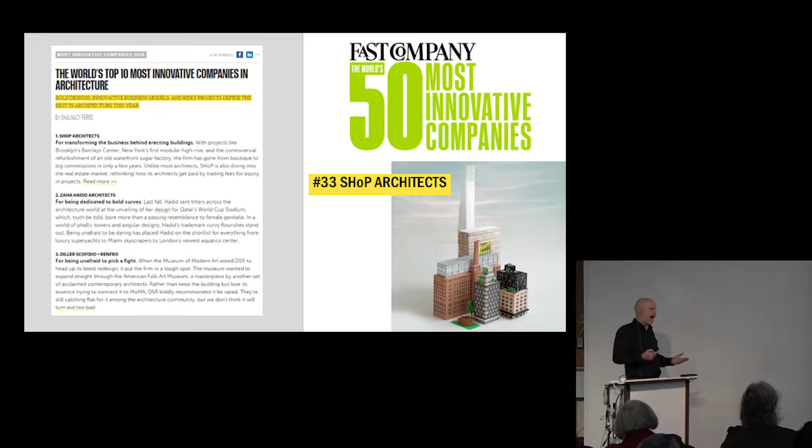The other side to the practice has to do with how we've embraced technology. We came out of school in the early to mid-90s, and technology was taking shape in the form of CAD, but also, more importantly for us, 3D modeling. It's funny when you look at it in the context of the history of architecture - sort of like Back to the Future - the level of complexity you see in Gothic architecture is almost a three-dimensional puzzle. Architecture is a very complex game on many different levels, and technology has allowed us to get back into it, where we can actually begin to talk and work directly with the people who craft our buildings.

And almost rethinking the way that we manage complexity. When I came out of school, plan and section was still the way that everybody managed this information. But really, it's moving beyond a representational document to an instruction set. When you look back at those model kits you built as a kid - hundreds of pieces, axonometric drawings - you never felt like you had to pick up the phone and call Tokyo and ask how to put your kit together.

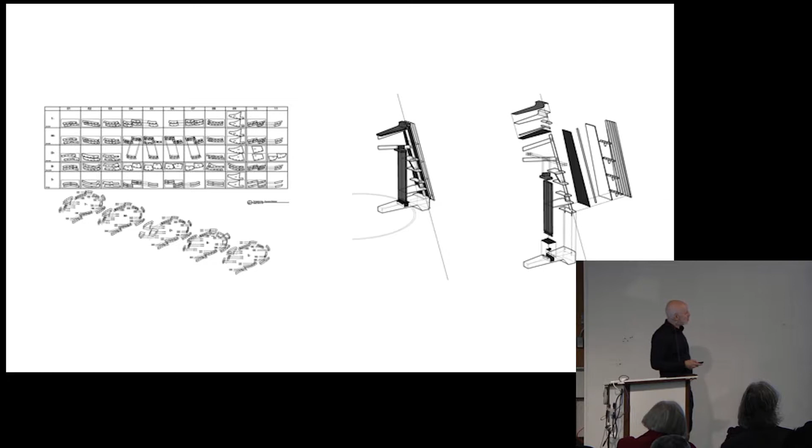That's what happens on the job site all the time - all these RFIs always asking, how do you do this? So we started looking at, especially on our earlier projects, how we began to manage this information in model form and index it, take it apart, so we can rotate it around and show it to the people who are actually going to build it. Much easier than looking at something in 2D and then trying to translate it into the third dimension. Things get lost.

Very early on in the practice, we started looking at these smaller projects as a chance to test out some of these ideas. PS1 was a very small project for a contemporary art museum that had this summer program, and we developed pavilions that would be occupied during the summer, based on the theme of the beach. We modeled everything in the computer, but instead of generating plans and sections, we literally developed a set of instructions.

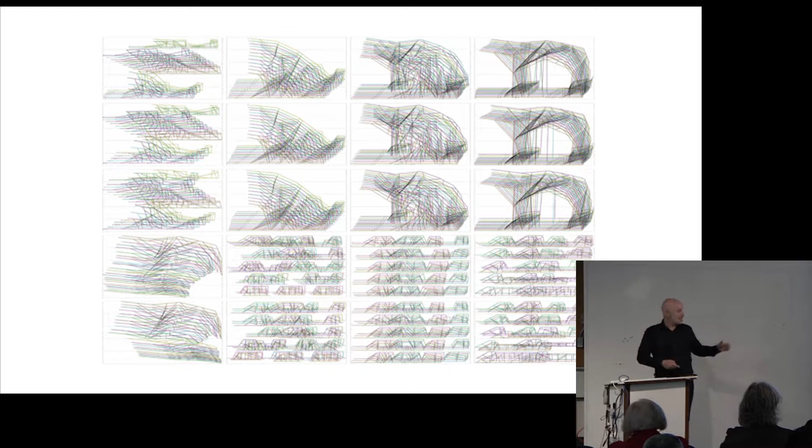These drawings here, you can't really see it because they're all sort of faded, but each sheet is about 1 meter wide by 5 meters long, ganged together to create a 15 by 20 foot long jig where you would actually build literally on the drawings. So in a way, instead of looking at a drawing, you were literally building off of it.

This came together, and we didn't really think it was polemical, like this is the Rosetta Stone for how we should be looking at architecture. It wasn't until a decade later that we realized how this was really the origin to our thinking about how important that digital model was and how it carries forward.

So there are a series of questions that I posed through this talk, and the first one is: what does it mean to be a master builder today? In a way, it's about not just designing, but how you execute on the design - how you collaborate with the people who are actually going to put the building together. You don't do that in that first project; you don't try and tackle everything in that first go round.

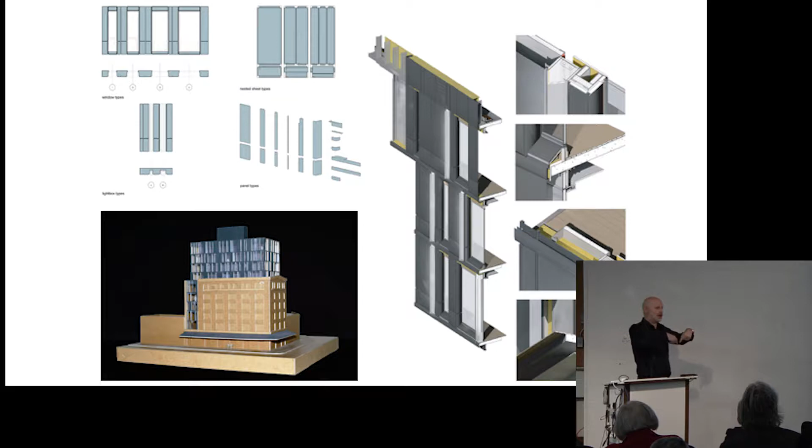For us, on one of our earlier projects from 2001, the Porterhouse, we literally focused on the envelope of the building to test out some of these concepts of direct-to-fabrication. We took raw zinc meter by 3 meter sheets and began to nest the panels on that, and actually generated the shop drawings. We emailed those shop tickets out to Malloy Laser on Long Island, where they were laser cut, then broken, and brought back to the site.

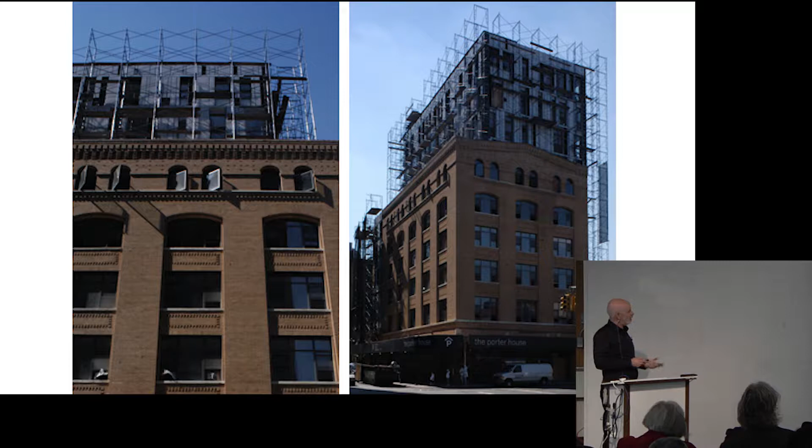These are some of the index sheets we generated for that. On the panels, before the white plastic's removed, you can see information telling you exactly where that panel goes on the building - like a watermark. It was a great opportunity to create a highly unique, beautiful, simple zinc facade with a variety of different panel shapes for the conventional cost of construction. We did this project for about $45 a square foot - that's 2003 numbers - but it was a chance to create something iconic at a conventional price.

I think we wouldn't have been able to do that without the use of this type of technology, that interface between the design process and the actual making.

One of the challenges we had is, in New York, we have a lot of pigeons, and the fear was you get a pigeon on this beautiful zinc, you'd have droppings all over the building. So we got in contact with the Natural History Museum, and they told us the angle of repose to keep your bird off was about 32.5 degrees. So we created what we call the pigeon slide. To this day, Porterhouse does not have any pigeon poop on it - simple things like that can just ruin a building.

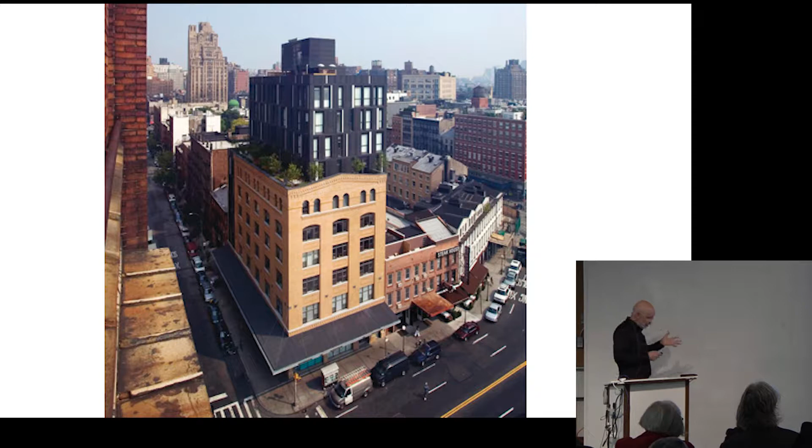And then there's some views. So this is 2003 when we finished this, and then in 2009, we had a chance to supersize this concept - instead of doing a 10-story residential building, actually beginning to wrap a whole arena in an envelope which we would design but also execute with the fabricator.

We didn't start off with this project outright. Actually, Frank Gehry had come up with a brilliant master plan where he had a collection of buildings that would basically cup the arena, and the structure for all these tall buildings actually went through the arena. The thing is, in 2008 we had the financial crisis, and there was no way the developer could finance the whole project at one time, so they had to break that apart.

The challenge is, in December of 2009 they had to have the shovel in the ground, or the developer would lose about $300 million in tax-free bond financing. There was no way, even if Frank Gehry moved ahead, that he would be able to get those CDs done in time to get that project online. So the design builder, Hunt Construction, told the developer, if you want to meet that deadline, you basically have to have already designed this building and built it somewhere else.

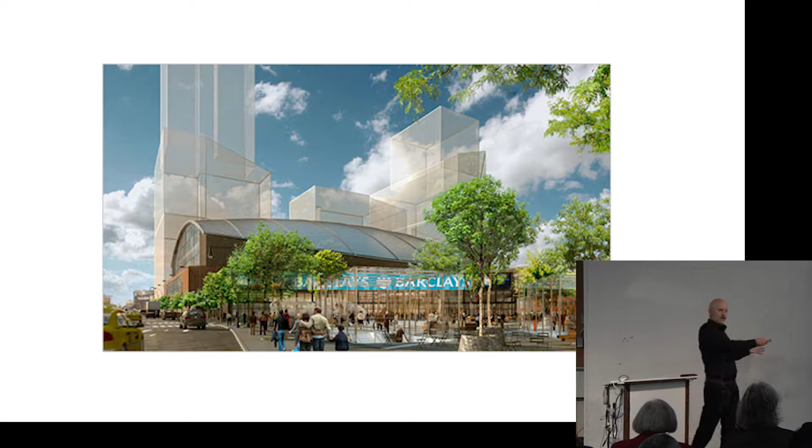And that's exactly what they did. They started going around the United States looking for an arena that would fit on this site, and they came up with the Conseco Fieldhouse. Unfortunately, the problem with this is Mayor Bloomberg and Amanda Burden, head of city planning, had just approved the Frank Gehry scheme. And then they got a bait and switch, which was a field house from Indianapolis.

So we got a call, they came into the office and said, we need something more iconic than this. We were already thinking, well, we could change this, we could change that. And they said, no, the steel's been bought, all the precast has been bought, you can't change the shape. And I remember in that meeting, we're like, well, that's like putting leotards on a pig. What are you going to do about that?

We figured if anybody was going to do this project, it should be a New York office. So we put our heads together and started thinking about how we could transform this into a building that really was very much a part of Brooklyn, with a sense of civic presence in the downtown.

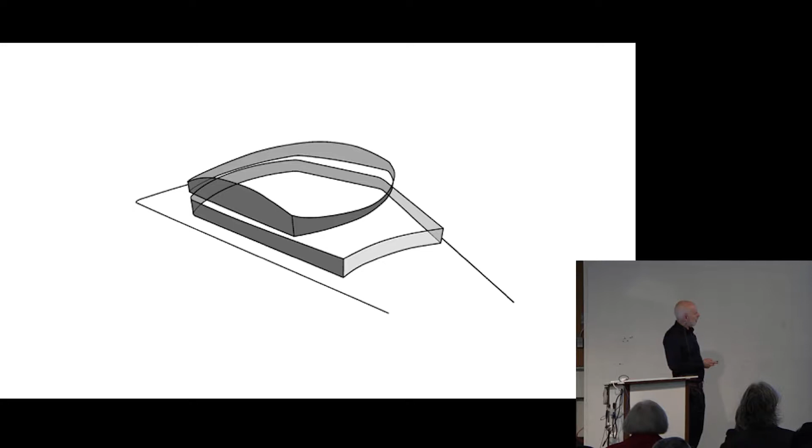So the first thing we started doing was figuring out how to break the mass of this building down into different scales. We created these bands, and at the same time opened the building up to the city around it. There's a major transit hub at the foot of the plaza, and the whole idea was creating a view where you could actually look from the plaza all the way into the bowl.

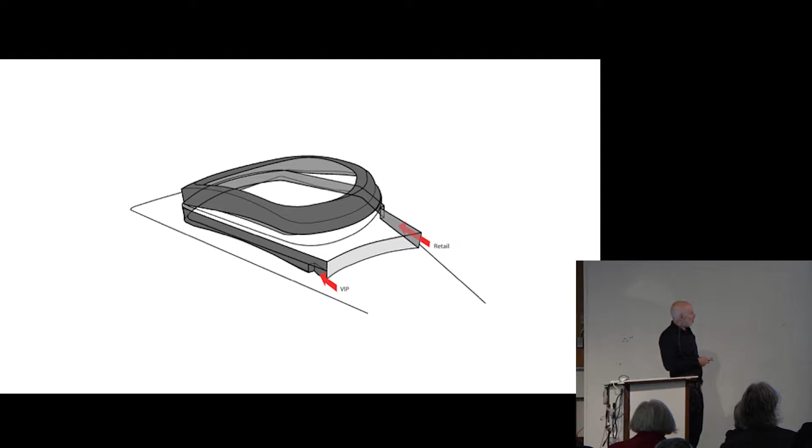Then we started shaping the form of the building to give views out back to Brooklyn, and creating openings along the side for retail and the VIP entrance. But for us, the breakthrough of this project was really about: you're plonking an arena in downtown Brooklyn, and you've got to give it a sense of civic presence, a place where people will gather before they go see these events, concerts, or sports.

So we created this porch with an Oculus in it. As you're moving up through the train station, you're actually looking through this space, and that Oculus becomes the marquee for the building. So a little more about the scale of it.

One of the key things for this project was we put the main concourse at the same level as the sidewalk. So when you go in, you're literally at the main level of the whole arena. You're not going up, you're not going down. You can actually look right out into the bowl.

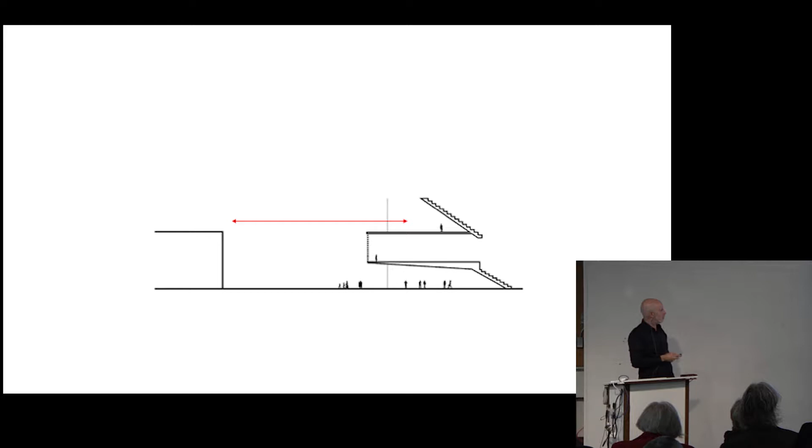Then at the upper level of the halo, we have a break, and that's in line with the heights of brownstones to the east and south of the building. And to the west you have much higher structures, so again we tried to make a proportional relationship to those as well.

We have nine subway lines converging at this point. People are coming up, so it's really transit oriented—this is not about people driving their cars. Pretty much 95% of the people come to this arena using public transit.

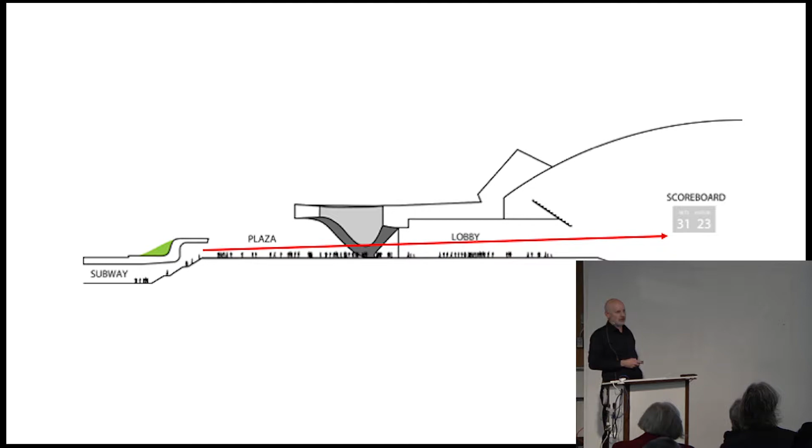It's a very iterative process. It's like designing a suit. As you're designing, you're tailoring it, you're having your second fitting. But you're not doing one model and then throwing it away and starting a new model when you go into construction. The model actually carried through design into the construction process.

And the way we did that, we started breaking down portions of the facade so that we could analyze it for quantities, so that we could really begin to optimize the surface area to get it within budget. So this really wasn't about compromise, it was more about what we call design optimization.

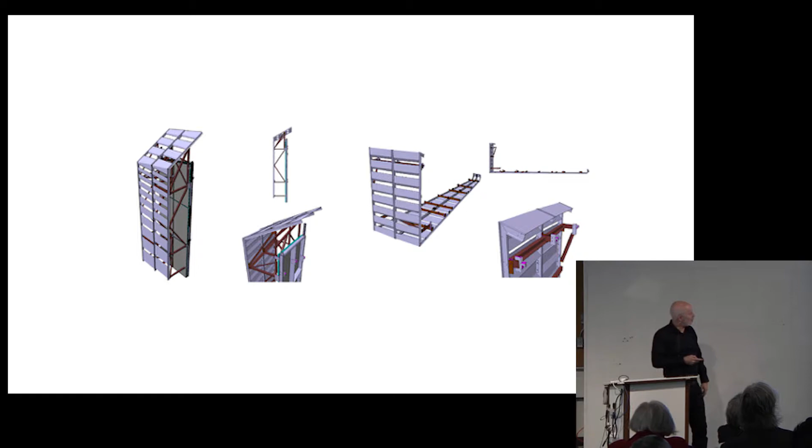And then this is a picture of the CATIA model. We use CATIA predominantly for our envelope work because we can go directly from design into fabrication with this technology—aerospace technology that Dassault Systèmes produced. And you can see here are just some view captures of some of the mega panels for the facade, and then one of the prototypes that was developed for wind tunnel testing.

So imagine you have 12,000 panels, and the old school way of doing it is you have one person doing a shop ticket, or a bunch of people doing a shop ticket for each one of those panels. John Cerone and Brian Sweeney from our office received information from the facade fabricator saying this is the information they needed to calibrate their machines.

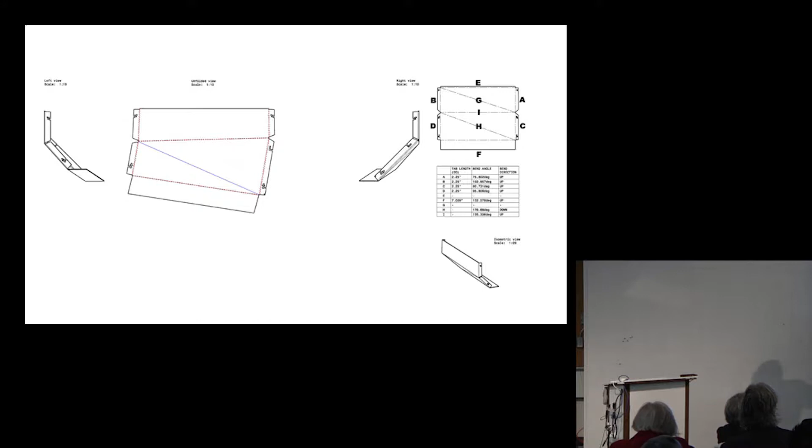So what they did was they set up a script that automated the whole process of generating these templates for the panels. So instead of having a room full of people drawing tickets, you have a few people basically managing the files using the script. And with design optimization, we saved $250,000 just in material by optimizing the sheet efficiently.

And then we turned the factory into one big dry cleaning rack. We wanted to do this building using weathering steel. Brooklyn has this industrial history, and you have the brownstones—they built aircraft carriers and battleships there. So we wanted a material that wasn't about stainless steel and glass. It was really a Brooklyn attitude.

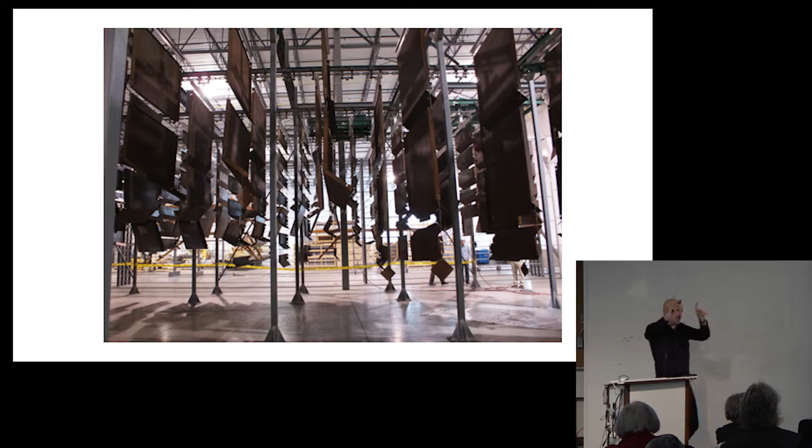And in order to get that material that way, we actually created these dry cleaning racks, and we hung the panels in sequences, breaking them into groups of 4,000. They went through a wet and dry cycle 12 times a day for 3 months to get them to about 90% rust.

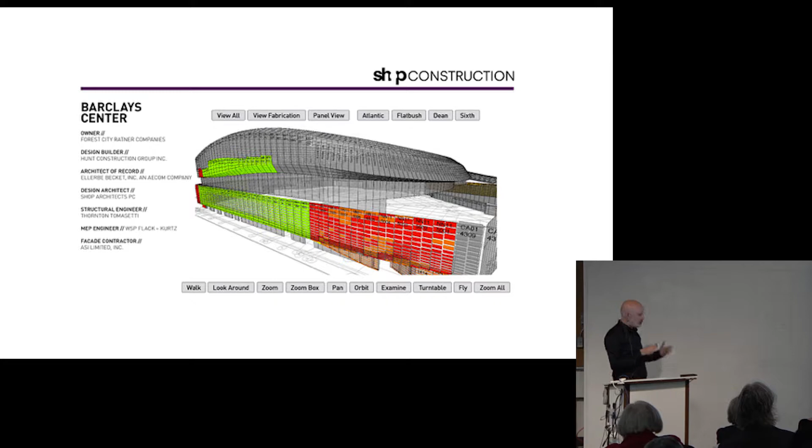And then the gang came up with an iPhone app where you can actually track where those panels were in the process—whether they were weathering, whether they'd been broken, or whether they'd been put up on the building—and they get dropped into a web-based model where you could see where you are. So it's very tied to how the model is sort of taking you through the process.

And here you can see more on the truck, up on the building, and then the upper halo, and here it is sort of nestled in downtown Brooklyn. And this is a view looking along Atlantic Avenue.

And then this is the Oculus. This was actually opening night for the Jay-Z concert. So that Oculus, we've had artists do pieces in there. Obviously there's advertising, but this has sort of become one of the new centers in downtown Brooklyn.

And so we went on to do all the public interior spaces, bringing in reclaimed wood, sort of addressing some of the bars, and then the black box sort of space of the arena itself.

So we took some of that, and again, we continue to focus quite a bit on developing envelopes on a lot of our buildings. In this case, this is a residential project finishing up on the east side where we're using copper. So that's what it will look like today, and that's what it's going to look like hopefully in 10 years—basically inspired by the color of the Statue of Liberty.

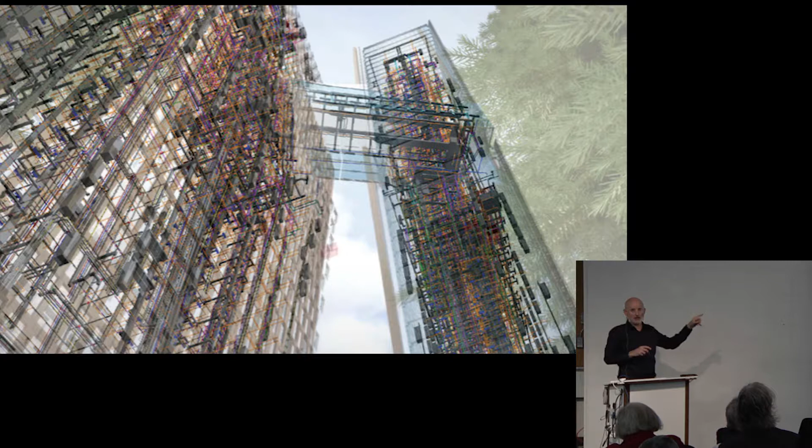So this picture, what you see here is the Revit model. All the surfaces have been turned off, all the floors have been turned off. What you're seeing is all the mechanical infrastructure that is needed to supply air, cool air, heat, and plumbing and sprinklers to this building. It's that kind of integration, that kind of complexity that we're looking at in terms of the future of how we use that model, and how that model gets turned over to post-facility management.

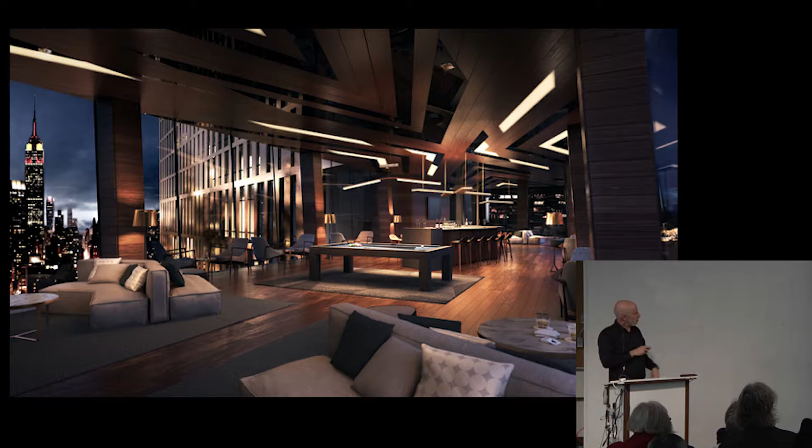You see some of the bridge structure. The unique part of this project is that it's a rental building, and the amenity space bridges the two towers and overlooks the East River. On one of the bridges, we have a pool with an infinity edge on top, and a bar, with a great view of the Statue of Liberty. So that's a fun project, but again, an opportunity to show how important the model is in terms of achieving this level of workmanship.

So there are projects where you come to the site and the context is everything. I think for our very first project, Waterfront Park in Greenport, Long Island, it was all about the context. We had won this commission, and the last thing the village wanted to see was a New York office come up there and tell them how their architecture should look. For us, it was really about creating a new sort of rebirth, a new renaissance for the village, through this idea of a park.

It's made up of many different things. We've got a harbor walk, a carousel house, an amphitheater, a seasonal skating rink, a camera obscura, a harbor master's house, and all these elements are knit together by this path that crosses the site. There's a picture of the camera obscura with the HMS Bounty in the background.

And the seasonal skating rink, a moment of Norman Rockwell here. But the challenge was, in these community meetings, we're surrounded by all this beautiful Victorian architecture, and there was this concern that we were going to impose some sort of modernist tenet on them. So one of the programs was to create a carousel house for this antique carousel they had - almost looking back at the concepts of the Crystal Palace, creating this beautiful glass house, but with huge bifold doors that would promote natural ventilation during the summer, and during the winter they would close up so you could use it all year round.

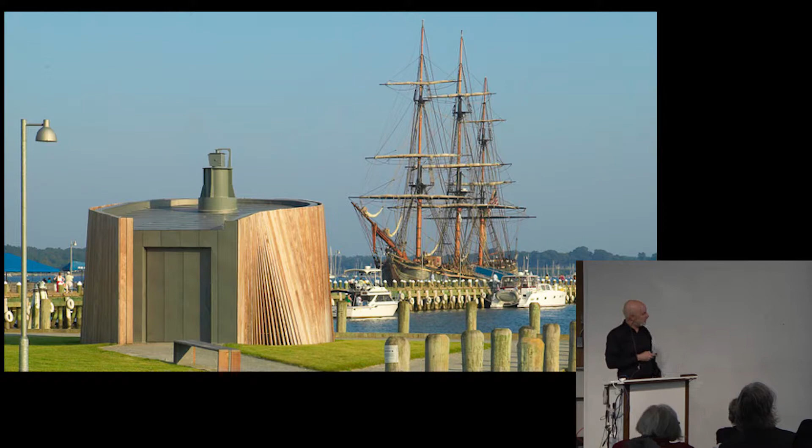Then with the camera obscura, which was the last of the buildings we did on the project, we decided that we would model this whole thing in the computer from start to finish. What you see here is some of the drawings that show - for those who may not know what a camera obscura is, it's a black box with a pinhole at the top that light comes through, it hits a lens, and gets projected down onto a surface with a mirror, creating this incredible vivid image of what's going on outside.

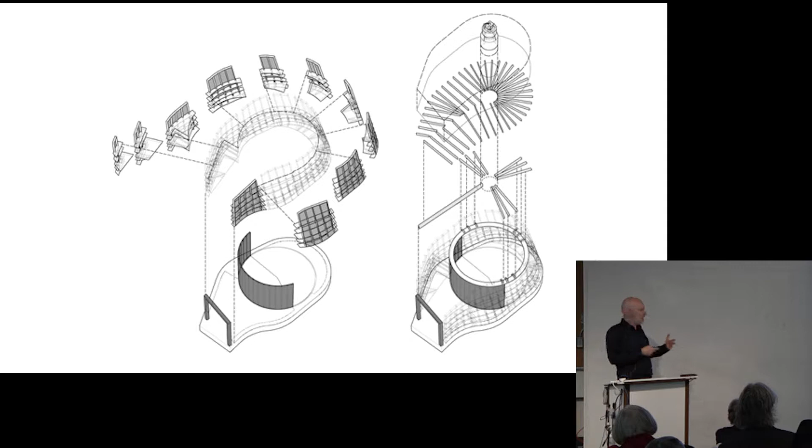So what you see here is basically the Rhino model of the camera obscura, a worm's eye view looking up into it. And what you see here is all the components that are needed to assemble it - thinking of that model kit again, how you go about explaining all the different pieces that go into putting this building together. And here, the same files that we used to pre-cut all the pieces for the actual building were the same files used to make the model. So those are all the pieces you need to build a camera.

There's an interior view. So if PS1 was that first step of rethinking how we manage complexity through these models, the camera obscura was like thinking about how much of this we could fabricate off-site, using that model literally as the instructions for the project.

Another project that is highly contextual is this tower that we're doing in downtown Brooklyn, 9 DeKalb.

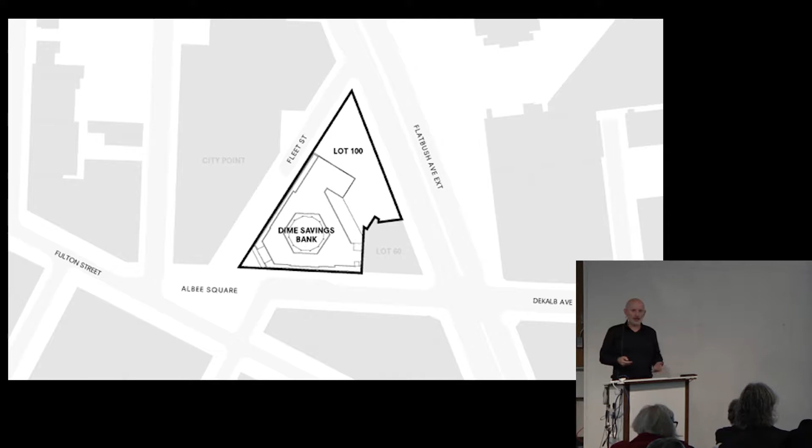It's formed at the confluence of two major roadways, Fulton Street and the Flatbush Avenue extension. One of the biggest challenges with this project is the shape of the site. It's a triangle. The other challenge, and it's a beautiful challenge, is there's a beautifully historic landmark bank building there, and just the quality of craftsmanship that went into the materiality is something you don't want to ruin by putting in a building that doesn't respect some of those qualities.

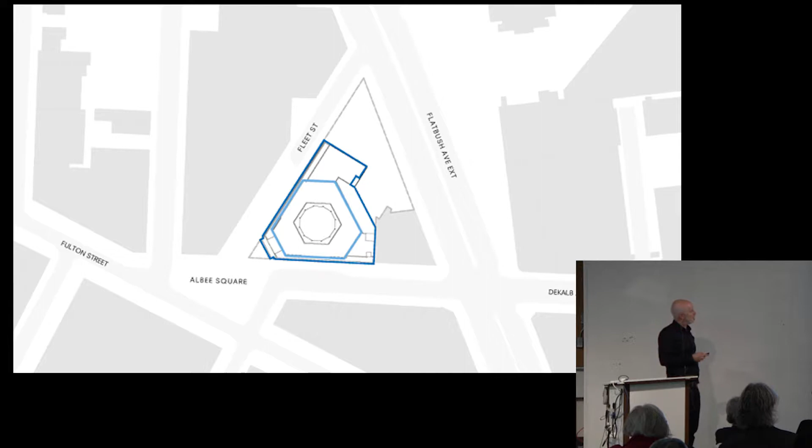The challenge is it's a very tough site because of its shape. So we looked a lot at some of the geometries inherent in the design of the bank itself, the hexagon, the triangles, and used that information to begin to proportion and map the site, integrating this new residential project without compromising the qualities of what's already there. In a way, we're literally using the geometry, the mathematics of the bank building to inform the mathematics of the residential tower, with this idea of an interlocking pair of hexagons.

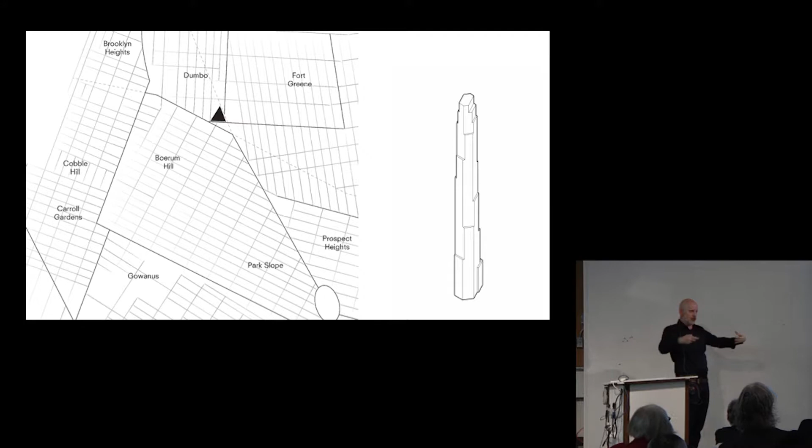The other thing that's inspired is the fact that you're surrounded by all these different neighborhoods converging at different angles. The great thing about a hexagon, instead of working with four sides, you're working with six. So the idea is how the building begins to face these different orientations to these different neighborhoods, with the setbacks spiraling up.

And starting to think about the materiality, how we could take inspiration from the banking hall and create that sense of verticality. So we started thinking maybe it's a number of different materials, also different profiles, almost thinking of it as a puzzle, and we started creating these different shapes.

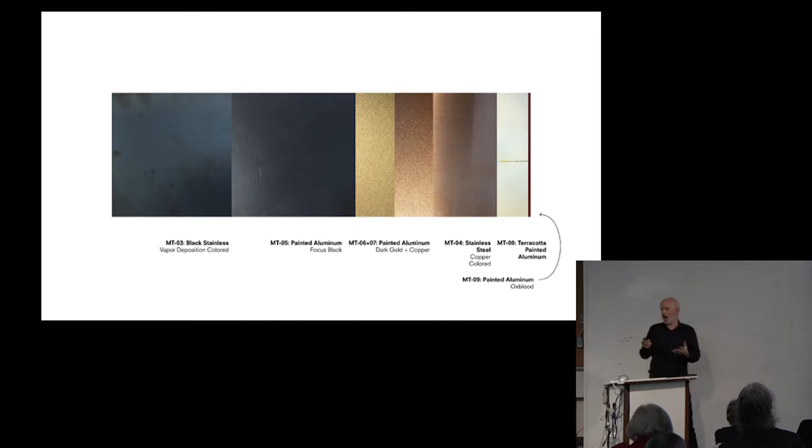Some of them would be in terracotta, some in black aluminum, some bronze, some stainless, and we started thinking about how we use those colors to organize how the building starts to grow, and also how we organize those profiles in terms of the facade of the building.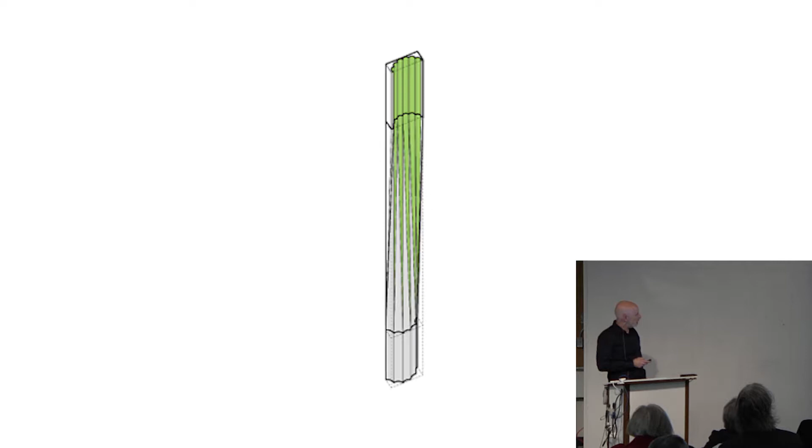We also thought about how we could use the fluting of the columns to dress the base of this building, the new entrances into the residential tower. We basically inverted the relationship of the fluting and lofted between the two to generate another sort of hybrid profile that changes as it goes up the building, and this will be along the base. So again, using a lot of the contextual qualities of the landmark to inform the design.

The last project I'll show you how we're doing that also with another landmark, the Steinway Tower in Midtown. But the banking hall is just exquisite — this is going to become the commercial space for the project.

And then there's a view from the Brooklyn Bridge. This is from the Manhattan side by the seaport. So this is another one that's, you know, when you start working on projects that are in the public realm, how can the design connect people?

I think for us, after doing Greenport, we won a commission to do a two-mile stretch of waterfront along the East River with a new park esplanade. The first thing was it was supersized in terms of the amount of community board meetings, DOT, local and state agencies. After phase 1, we had over 130 meetings with different city agencies to go through this whole process.

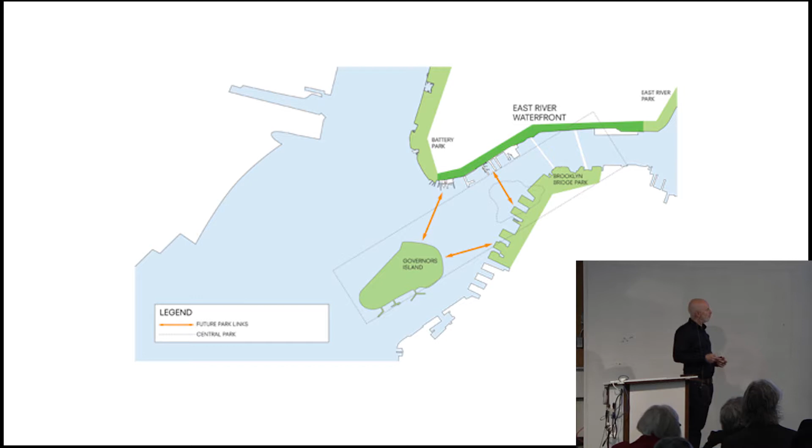Very intensive — you have to connect with a lot of people there. But the other thing we analyzed is, with all the new parks coming to lower Manhattan, if you count them all together, Governor's Island, Brooklyn Bridge Park, the Esplanade, Battery Park, it's about 400 acres, half the size of Central Park. All this park space coming to lower Manhattan. So for a city that's changing and becoming more 24/7 down here, with families moving in, this was a great thing.

The challenge was connecting these people to this waterfront. And at that time, when we started in 2003, this is what we had. We had garbage, we had parking lots, we had chain link fence.

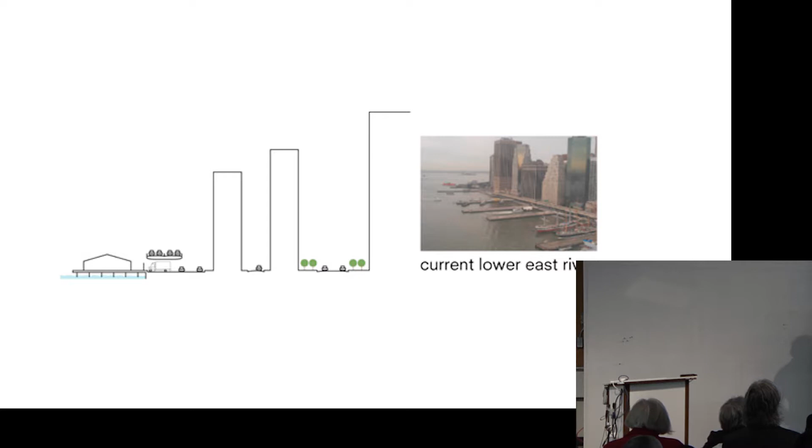So the first thing we did was rent a helicopter and fly around the five boroughs and look at the way that the city met the waterfront. And down where we were, this is pretty much how it is. You had Water Street, you had Front Street and South Street, then you had parking, you had the FDR Drive,

and you had a bunch of warehouses. So it was not a place where people would want to go and touch the water. So the first thing we did was get rid of the parking, add landscape, add bike paths, and actually take advantage of the FDR as a free roof to put new programs underneath. And so here we started to sort of begin that reconnection of people to the waterfront with this approach.

And so this is the view. At every cross street, we created a step down, so where the old slips would be. So this one's over at Wall Street. And you can see there's the FDR there, and there's actually a dog run underneath at that point. But really bringing landscape, bringing the sort of the old Manhattan quality of Manhattan back to the East River.

And there are moments where we created bar stools. Nobody's going to sit at these places, but actually people come down here and eat their lunch here. They pull out their laptop, they do work during the summer down here. It's become a big hit, and actually I think these are being prototyped for other parks along the waterfront.

There's the step down again. So at high tide, the water does come up to the lower step at night. And then this is one of the restaurants that was opened up recently underneath the FDR. This is Industrial Kitchen.

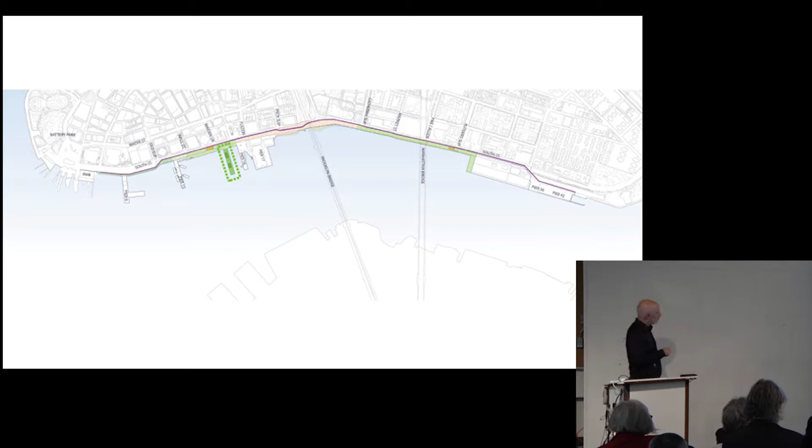And then we also are developing a series of pier structures, Pier 15 and then Pier 17, which is in construction, and Pier 35. And the idea here was to create these double-decker piers where you could actually utilize commercial on the lower level, maritime activities on the lower level, and a new park on the upper level.

And that's the view again, looking towards Brooklyn before Brooklyn Park was finished. Looking back at Lower Manhattan. And there it is at night.

So this was one form of how design was connecting people, in this case connecting people with this vast waterfront. Another one, at a more sensitive level, is a competition we recently won for a Veterans Resource Center at Syracuse University.

So in the history of veterans in the United States, after World War II, we had the GI Bill, and a lot of universities just had a huge influx of veterans coming back from Europe and from the Pacific. Syracuse tripled in size, and they had no room to put all these veterans, so they put them into these bunk houses right on campus.

Today, you don't see that. The interesting thing is you don't really even see the veterans. They're sort of compartmentalized in different places of the campus. And the idea here with this resource complex is really to make that connection not only with the campus but also with the city of Syracuse, with the veterans seen as being a part of that bridge.

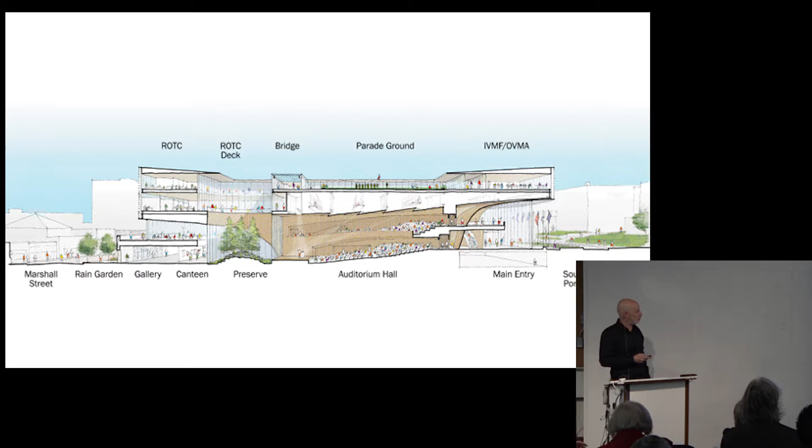One of the challenges of this project, when you have people with disabilities, is making sure people can get around and not have to just rely on elevators. So all the surfaces, all the platforms in this complex are connected by a series of ramps, in some cases pulling you through galleries or into the theater or up into the building.

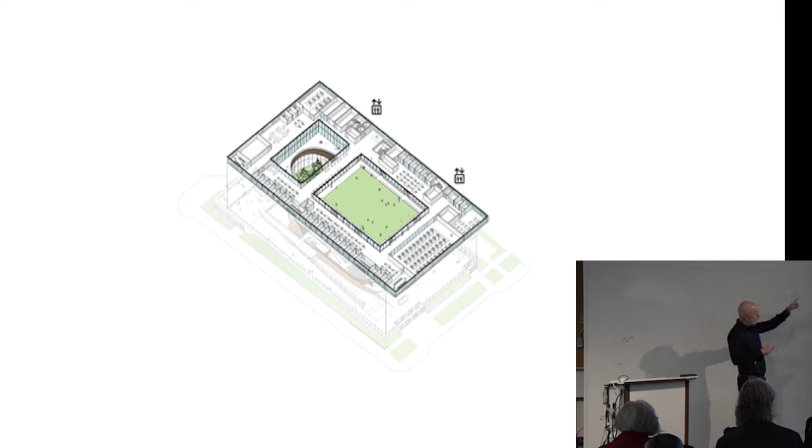We also brought the concept of landscape into the core of the building. On the upper level, we created a parade ground, which in a way is the cloistered space for the administrative activities that take place here. And here you get a view back towards the campus.

This is a picture of the model, so you get a sense of how it rises up and opens itself to the surrounding campuses. Again, it's not trying to close itself off from what's going on around it. And here's the view from University Avenue.

So this is a project that we're in schematic design on right now.

Another area that we spent a lot of time on is how you inspire creativity through space. We've had a chance to work with really interesting companies like Bloomberg, Google, Uber, and a few other tech companies, where a lot of people are actually in creative mode, scripting, coming up with new ideas. What kind of space, what kind of architecture drives that type of inspirational activity?

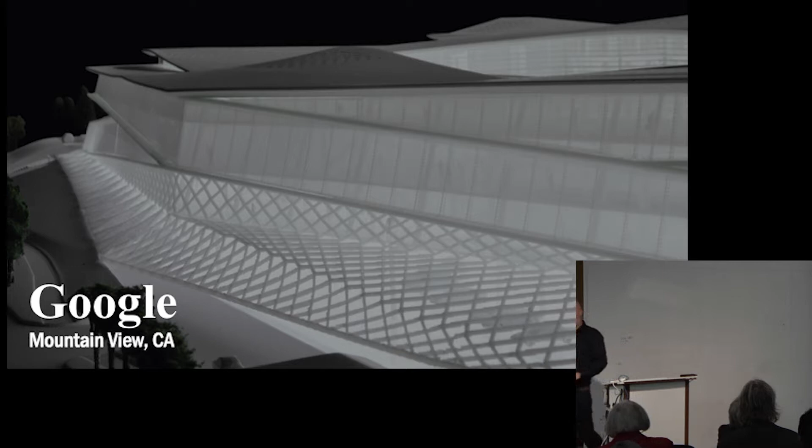One disclaimer: we actually didn't execute on Google's headquarters — I'll go into why in a minute. But it was the first project where we really had a chance to think about some of the ideas about what creative space making is about.

We sat down and worked with the founders. When we were working with Larry and Sergey, they were riding their scooters and bicycling through their office space. It was this whole idea of moving away from just a field of cubicles and creating different moments — one minute somebody's over there playing ping pong, the next moment somebody's working on script. It's this idea of a living community that's moving around, not just subjected to one type of way of working.

So we started developing different plans to deal with different conditions, sometimes facing towards landscape — the idea of almost like a village.

The other thing that was critical to this project was really looking at a zero carbon building. This is back in 2006 — we hadn't really been thinking about these issues too much, but this was a great opportunity for us to begin to engage it. The silver lining is that my wife, Anna Dyson, who's director of CASE, the Center for Architecture, Science, and Ecology, has her whole focus on next generation environmental technology.

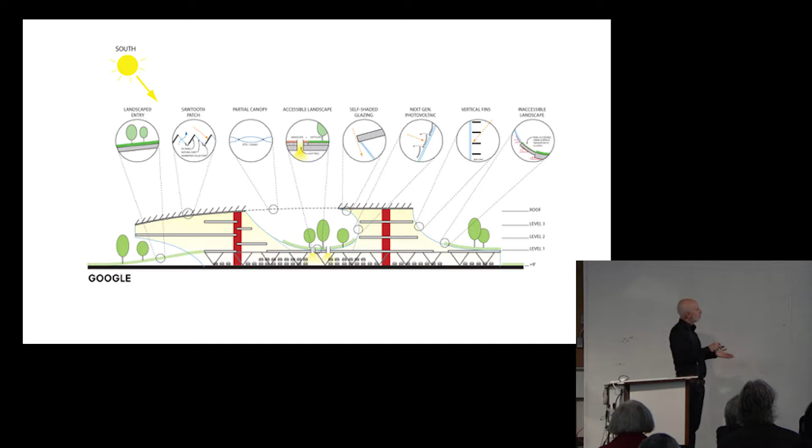So what was great was we were beginning to look at how we could take these new technologies that aren't just applied, but actually integrated into the architecture. This is a photovoltaic CPV system utilizing concentrator technology that basically tracks the sun within a double skin facade.

What's great about it is it not only tracks the sun and generates a lot of electrical current, but also high quality heat — upwards of about 86% combined heat and electric — and it also takes the glare out of your space because it's always pointed directly at the sun. So you're getting that sort of what you call artist light.

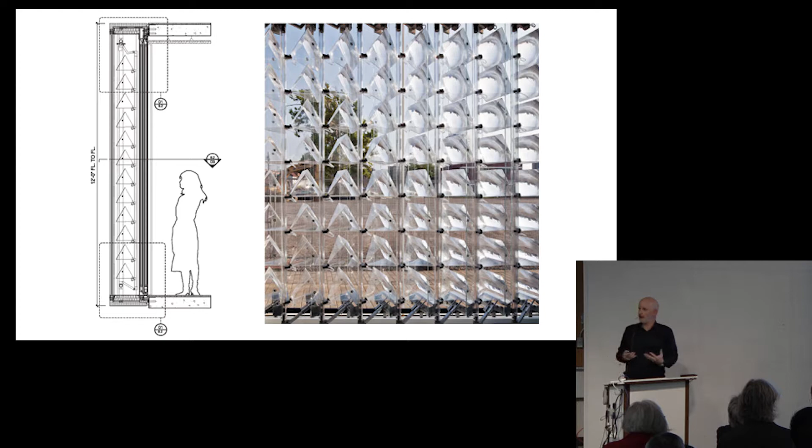But the thing I like about it is that it also looks really great. It's not like slapping photovoltaics on your building — it's very much integrated into the architecture of the space. So this is a rendering.

We're right now in our 18-month commercialization phase — we're supposed to be through it by next July. We're working with a manufacturer in Seal Beach, California, named Arzon, on getting this technology to the marketplace.

Another thing that she's developed and has patents for is producing clean air technology using hydroponics.

This is an actual photograph of the FAB system installed in one of SOM's new buildings, a security lockdown building in the Bronx. The containers that the plants are in are actually the ducts, and the dirty air is flushed through them while the roots, the rhizomes, take the particulates out. This is an example of a workspace where we rendered that whole concept out, and it also works great as an acoustical backdrop for these types of environments.

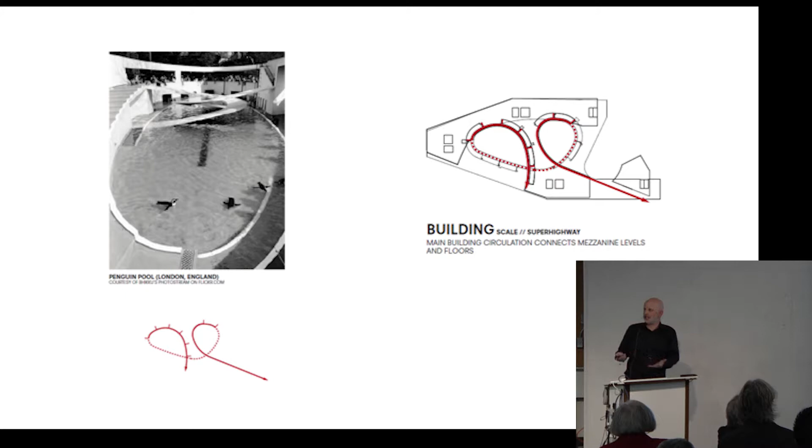The other thing to think about when organizing these activities, you're talking about hundreds and hundreds of people working together, and how do you manage that so it doesn't just seem like a sea of people everywhere. So you start thinking about circulation, about places where people come together, like the micro kitchens at Google. Food is everything in a way at Google. Everybody groups around food. It's always free, but it's also really good. And that's when people exchange ideas.

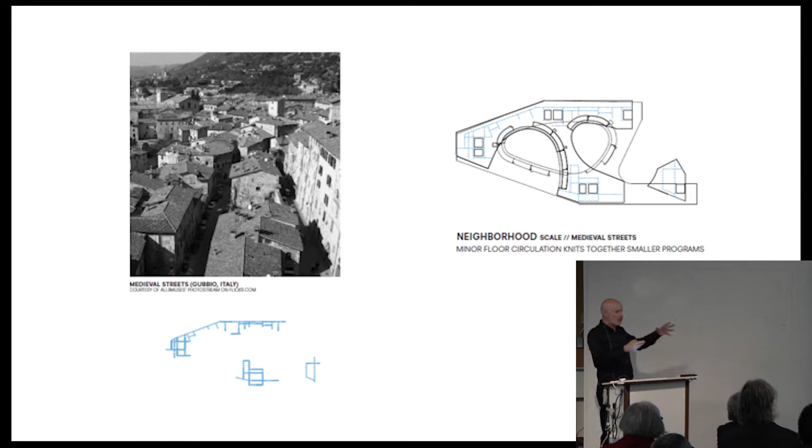The other thing is it turns into sort of a hill town, where you have all these different streets and engineering groups, all mixing together, with plazas where they come together. Pulling all those ideas together generates this engineering creative community. This is one of the floors - you can see the ramp space that connects all the engineering floors together. It's one of the models.

We were really excited. We had just finished CDs, and I was flying in from New York, and the day I left New York, Lehman Brothers still existed. When I landed in San Francisco, Lehman Brothers didn't exist anymore, and neither did this project, because for Google, spending $400 million on a project when the bottom was falling out everywhere else - obviously they were doing really well, but it just didn't make good sense. So the project got cancelled. We were extremely bummed about that.

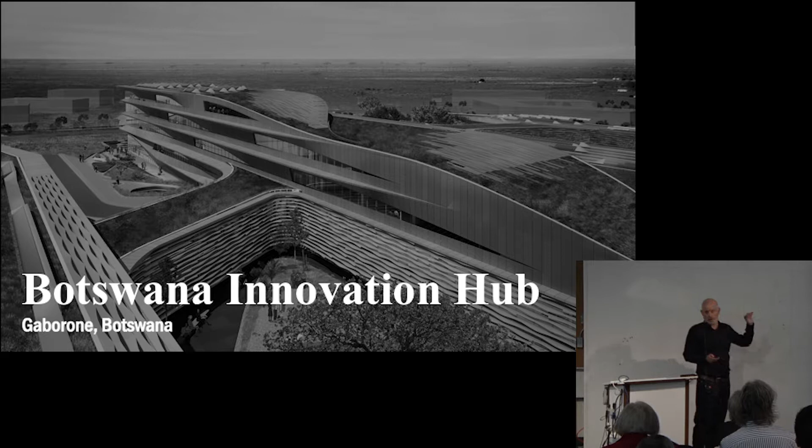So what do you do? You do a competition. There was a competition for an innovation hub in Botswana. Their main financial resource is in minerals, specifically diamonds. They knew it was going to run out, so they were interested in diversifying, and wanted to create an innovation hub mainly focused on biotechnology. So we did this competition and took a lot of the knowledge we developed at Google and applied it to this project.

The only difference is Google was in the northern hemisphere, and Botswana was in the southern hemisphere. So we just flipped them. But a lot of the inspiration from that project carried over into this. And for us, everything is very iterative. In this case, we were looking at an arid climate, but one that's also got this incredible delta, bringing those two worlds together.

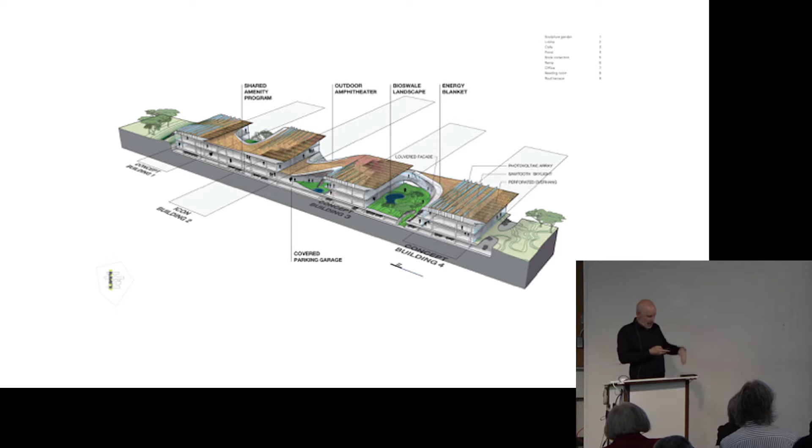There's a series of bars which would become the lab buildings, connected together, and literally the building became this sort of natural self-ventilator, where between each of the bars, the labs, you would have these parks. Grade was defined by the parking - we didn't actually dig down, the grade was the parking level. We had these old growth trees that literally grow out of the parking level into the cloisters. This is sort of like the cloisters of the monastery for the 21st century. Then you have the bridges connecting the different lab spaces.

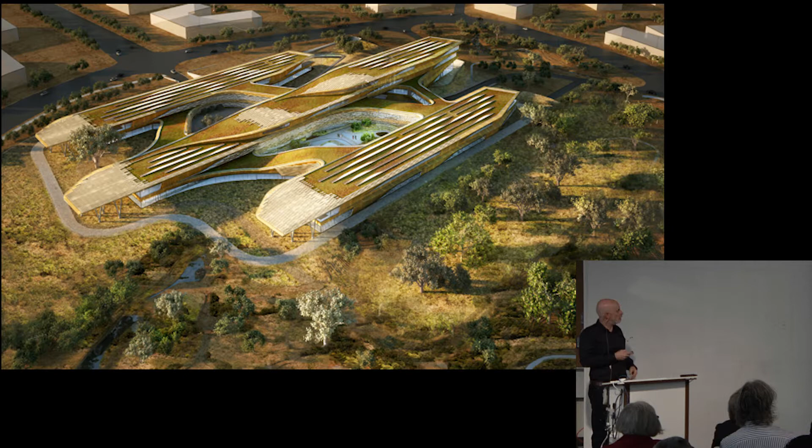After having done Google, we became very sensitive to understanding how building performance can be managed much more succinctly. In this case, doing solar analysis influenced the way we looked at our models and developed them. This is an overhead view of the project, and this is a view from one of the ring roads.

When the government came to visit us, they said they didn't know who SHoP was, and we showed them how we were using technology. It was so amazing, because sometimes we show this technology to people in New York and they say, no, we like to do it the old-fashioned way, we make money this way, why would we change? But in Botswana, they were so excited, saying you've got to teach us how to use this - we want to use this technology to build a building.

At the same time, we wanted to have a connection with the local craft that was going on there. One of the things we noticed was highly evolved craft in baskets. You might ask, how are you going to make a building out of baskets? But it was more about the technique, the geometry, the materiality - how do we take that and bring it into the building?

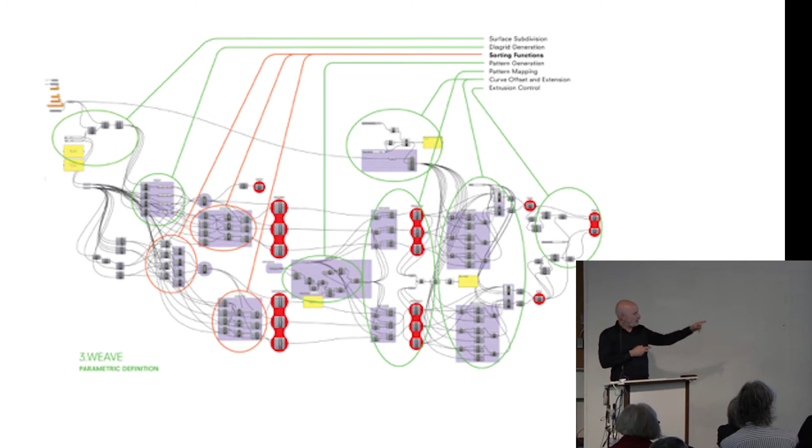So we started thinking about how we could literally wrap the main conference space, the theater, with this approach. We started analyzing how the pieces would come together and developing some of our own tectonics from that. Then we took it into Grasshopper, and then took those models and actually 3D printed them. The client made their decision based on the 3D printed model, not on drawings or renderings—literally touching the model and seeing how the light would hit it.

This is a really crude prototype we made in our office. We're actually working with a local furniture designer who's fabricating this system, and compared to what we did, it's highly refined, a really beautiful tectonic. It's not only going to work for acoustics, it also works for bringing air into the space.

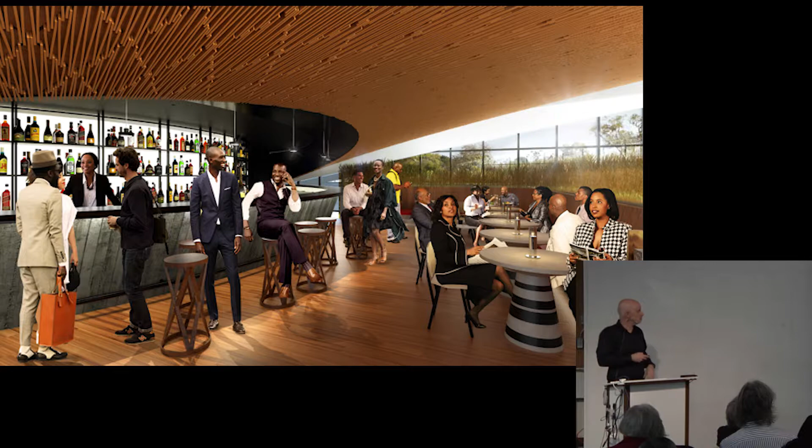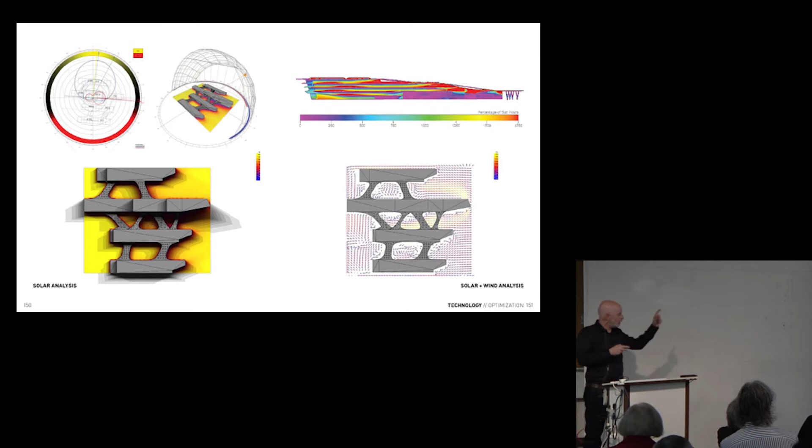One lab's courtyard space. So this project, again, involved doing more analysis on how we protect the labs, creating shaders.

This is another case where we're generating all the shop information in New York and then working with a fabricator in Cape Town, South Africa, who's fabricating it. You can see here's a mock-up on the building.

It'll be the largest brown roof in all of Africa when it's done. And this is some shots in construction—very different, my twin brother goes there a lot, and it's obviously a very different construction environment there.

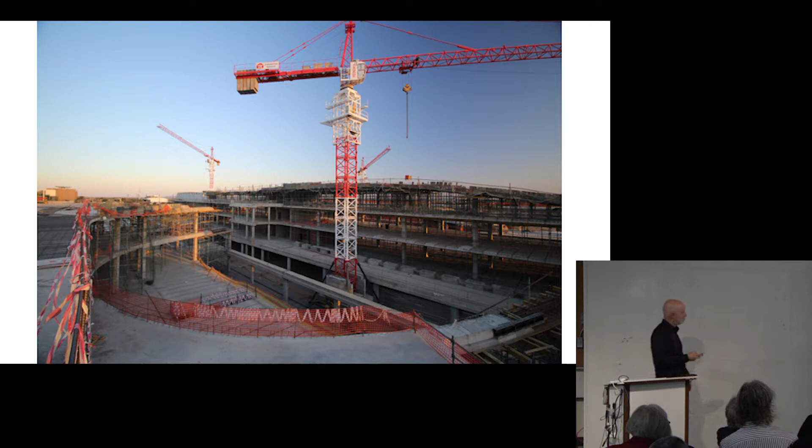So that project will be done in the next year.

So another project—and this one again comes back to the idea of how you design a project in a city, how it can embody qualities of that city. I think when we won the commission to do Uber's headquarters in San Francisco, it was all about how you navigate the city. When you open the app and see where the car is and it takes the wrong turn, you go, why is he going that way?

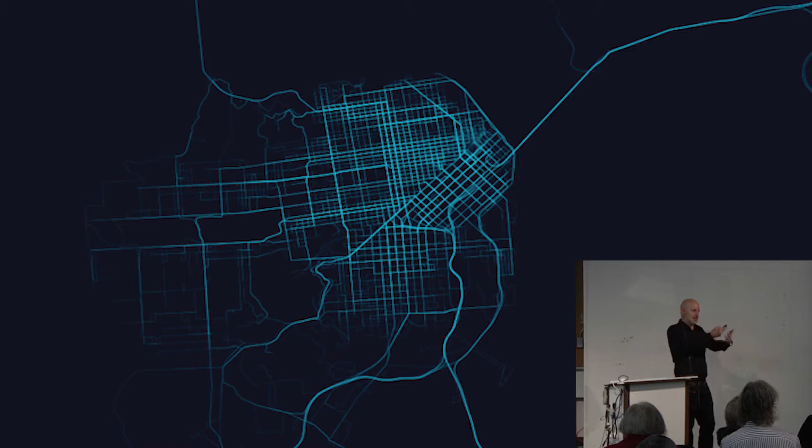Well, why is she going that way? But the idea that you can actually see it, visualize it, sense the city—that was something we talked about with the founder: how do we make that pretty much the iconography of the building, the way the building would perform. It's an extension of the city. And the great thing about San Francisco is, like New York, it's a vertical city, but vertical in the sense of its topography.

So we took the idea of the San Francisco map and turned it vertically, and started looking at how people behave there at Uber. It's interesting—doing the analysis, there was this move towards open offices. I think Bloomberg spearheaded that. But now there's a move back, where people want some privacy, some private time. So there's this move back towards that.

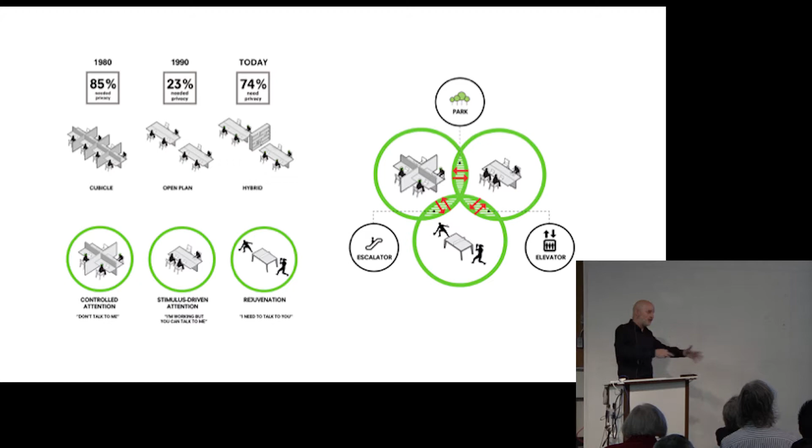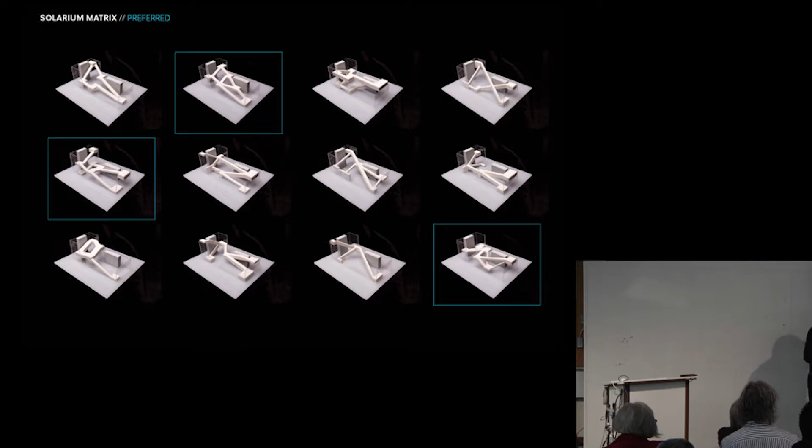But what we found at Uber is 50% of their time is spent away from their desks—they're actually collaborating, so there's a lot of movement within the company. The idea, again like Google, is creating these spaces and connecting them to amenities or landscape, opening that whole experience up. So we took that idea and coupled it with the idea of the sidewalk, thinking about how we could extend that idea and connect it with these different amenity activities.

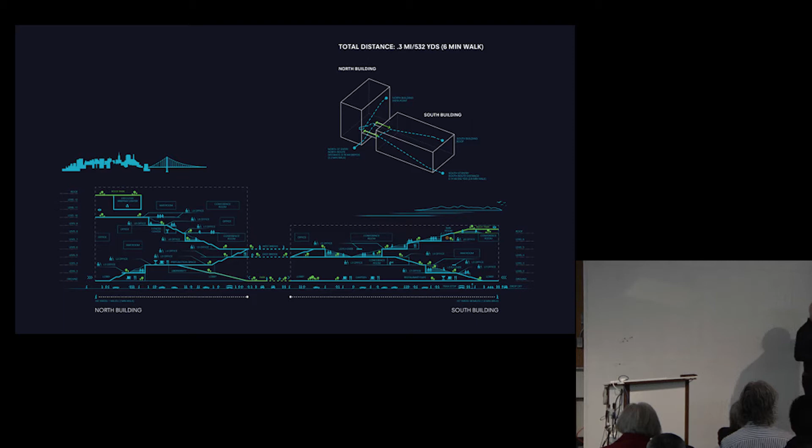It's like the app—you're looking at it, you can start to see the activity that takes place. But this is really the shared space for everybody working in that at Uber.

We wanted it to be really transparent, so we have skylights at the top bringing light down. One great thing about working in San Francisco is the climate is pretty great year round—you can open your window. So the idea is we created a non-conditioned commons so that we didn't have to use IGUs, very thick glass, and could really create a highly transparent facade on this building.

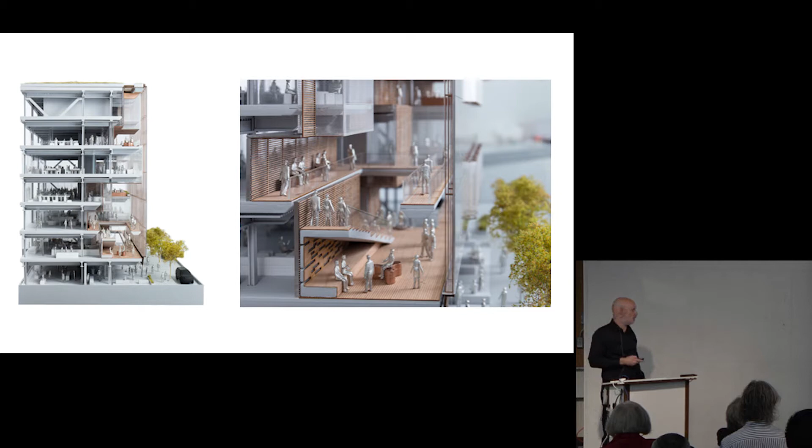Then there's some views looking into the commons. We took a lot of inspiration from Mission Bay, where the building's located, which was a major industry, shipping industry area, a little like the Brooklyn Navy Yard. So taking some of the colors, some of the qualities of that, and bringing it into the interior of the building. This is a view along 3rd Street.

This is a view from the corner of 3rd Street and South Street. One of the things we thought about—even if you didn't work at Uber, you should have a chance to peek up there and see what they're doing. So at the front door, there's an Oculus, and you can literally look right up into the commons from that point.

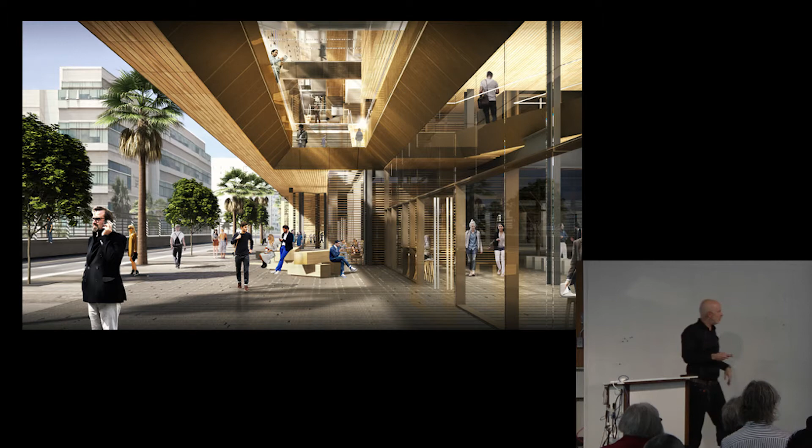This is a view inside, street level. And then there's a series of bridges—they're actually glass bottom bridges, but one-way glass so that you can't look up, but you can look down. The idea is it's just that moment of suspension when you're crossing from one building to the next.

Because this climate is so conducive to opening the building up, we started analyzing airflow and heat buildup, and started looking at the idea of maybe the facade is a breathing facade. Using a building monitoring system, we can actually calibrate that facade throughout the day, and it will automatically open and close when the space needs to be cooled or kept warm.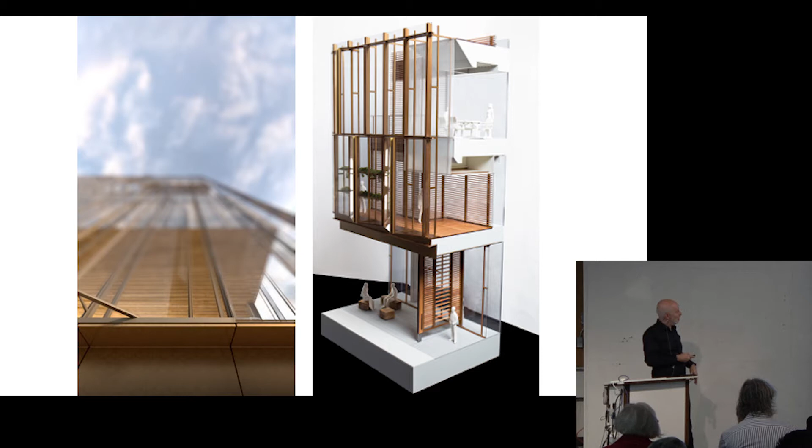So for us, this really becomes the iconography for the whole building. You've got the people moving around, collaborating within the commons, but you also have the skin of the building changing. It's sort of like this space is a bit warm, so the windows would open up. So the idea is even though they're very simple glass boxes, they're actually constantly, we hope, constantly changing.

So to end on these last two projects—everybody in New York has an opinion. When we start working on projects in New York, sometimes we don't think about, could we do this project here and do it in Singapore? Could we transplant it somewhere else? When we start thinking about doing work in New York, we really, in a way, we are almost selfish. We do it for New Yorkers, and we think if New Yorkers like it, everybody else is going to like it too.

But I can tell you, when developers kowtow to outsiders, New Yorkers usually don't go to those places. The South Street Seaport's a perfect example—they built this sort of festival mall that really belonged in the suburbs. Nobody from New York would ever go there because, why would you go to a mall when you have the island of Manhattan? In a way, it's a huge mall.

But this is probably the smallest project to date that we've ever done. This is what we call a talk box. It's a collaboration with public radio, their flagship radio, WNYC. The idea here was there's a lot of people—the idea of calling in and talking on the radio, a lot of us are quite comfortable with doing this, but there's a lot of people that don't have that kind of access.

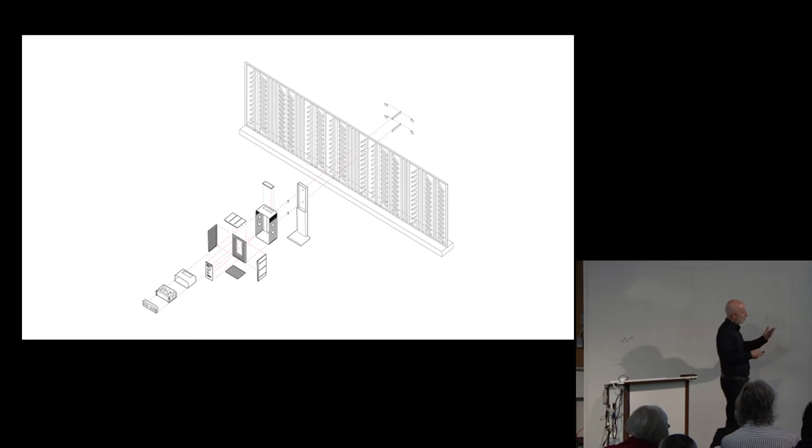So this is something that we were asked to look at. We actually fabricated and prototyped it in our shop. And then we installed it at St. George's Station in Staten Island on the anniversary of Eric Garner's death. And it was amazing the number of people who came and spoke.

What was really quite amazing was the most profound comments came from children. You can't imagine a child picking up a phone, calling a radio station, and sitting on hold waiting to get picked up. But here, where they're waiting for the bus or the ferry, you pick up the phone and you get a prompt, and usually the questions are specific to the community.

So it's not necessarily a national issue, but it could be a community-based issue. And so you start to hear real-time conversations, and it can be updated. The radio station has direct links to the phone, so they can update the questions in real time as well. We've done one prototype, and now we're looking at doing a whole bunch and spreading this idea to a number of other cities.

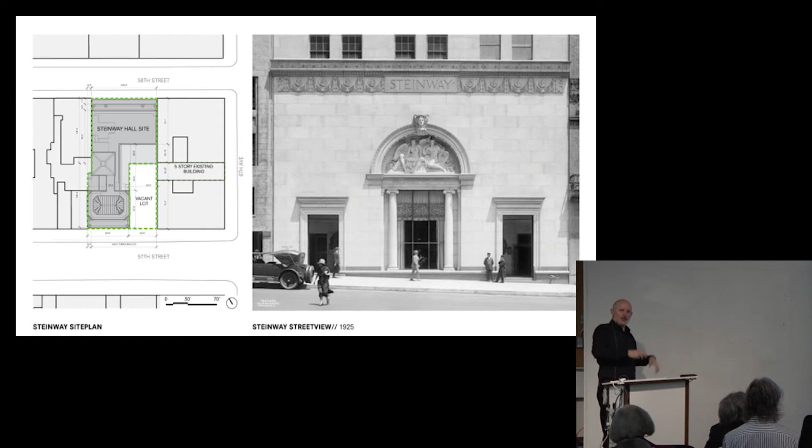This is the former home of the Steinway Piano Company—this is where their showroom was, and people would come here to check out the pianos. One of the challenges when working on a landmark site is that your project gets reviewed by the city landmarks committee. An as-of-right scenario would let us build 120 feet right on the street wall.

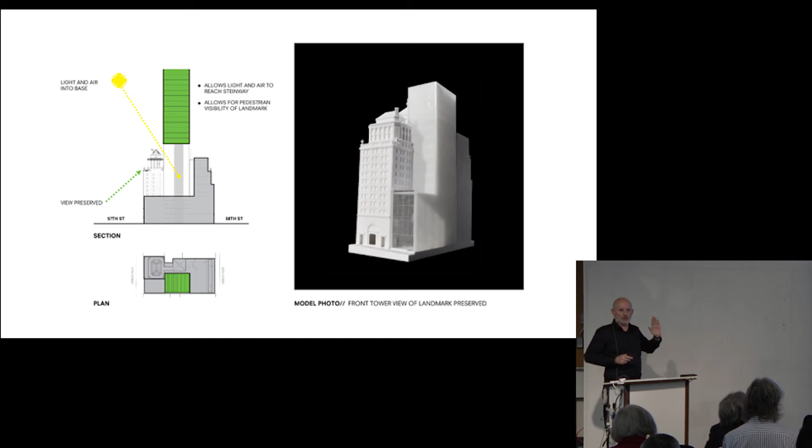But we thought, we have the space back here—what happens if we move it back and lift the tower up, so we can expose all three sides of the landmark, while also bringing light back to the interior of the building. We were still required to build an 86-foot street front on 57th Street. If we didn't, we'd probably push it all back to really open up this building, but because of that requirement, that's as far as we could go.

But it was that kind of move that Landmarks was quite excited to see. There were a few other things, but the idea that we were pushing the new building back and really bringing the landmark forward, exposing it to the pedestrians on 57th Street, was something they were very sensitive to.

And then redressing the side of the wall with limestone, bringing it down and opening up a new opening into the rotunda of the historic building. This is the commercial entrance for all the retail. The residential entrance is actually on 57th Street, and then there's a porte-cochere on 58th Street.

So coming back to this building and thinking about it as a New York building, not something you could necessarily plunk down somewhere else - one of the things that's really iconic about New York skyscrapers are the setbacks. That came as a result of building these early skyscrapers without setting them back, creating dark shadow canyons, which you can still experience today if you're down on Wall Street or on Broad Street or Pine Street.

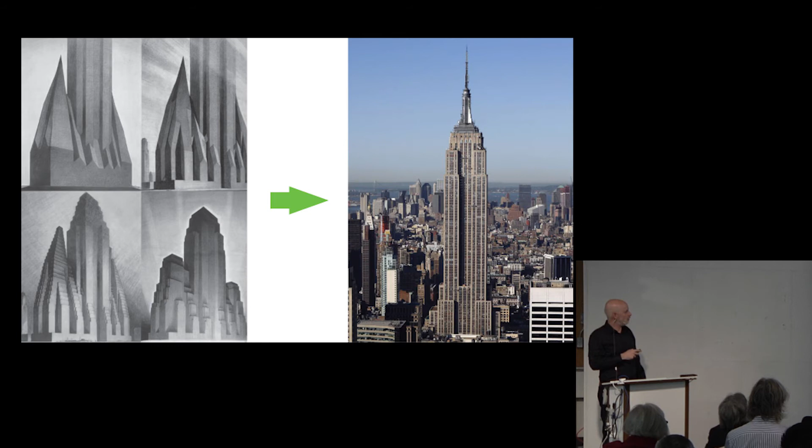So we have the same rules here - we have a sky exposure plane. In order to stay out of the sky exposure plane, we create a series of setbacks. We thought, well, why don't we feather those setbacks even further and create many more, basically based on a rhythm of 5 feet, and feather those setbacks right up into the sky.

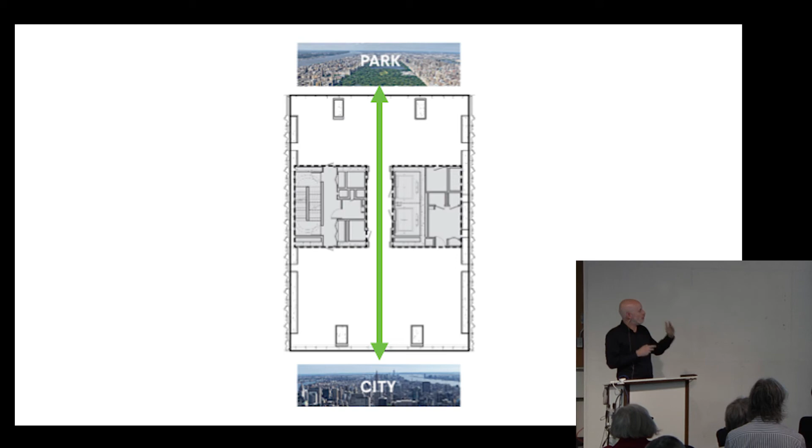I'll come back to that in a moment. This is looking at the idea that you come off your elevator - the building's almost directly on Central Park, so you have these unobstructed views to the north, and then views to the south, with living on the north side and sleeping on the south.

And they do show some of the plans. But one of the challenges of doing these buildings - technology plays a big role, digital technology plays a big role and is moving the bar when it comes to how we practice as architects and work with builders. But material science is really where the big breakthroughs are happening.

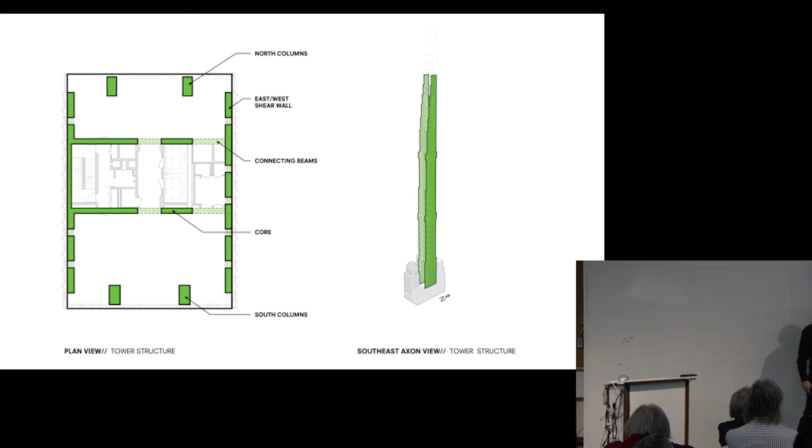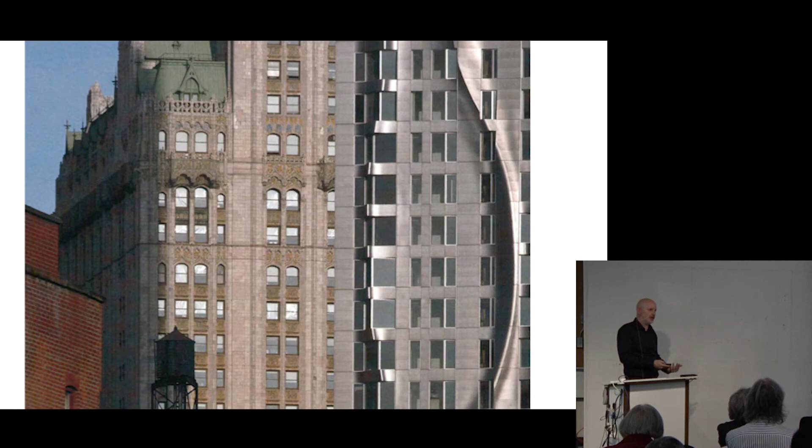And when the architect did the Woolworth Tower, he didn't just put terracotta at the base where you can touch it and see it - he carried that terracotta all the way up into the cupola of this building, the Woolworth. So this is Louis Sullivan's building on Crosby Street, looking at the level of intricacy and care and craftsmanship that's just taken up through the whole building. You see it in the Flatiron Building and obviously in the Woolworth Tower.

So we started thinking about the possibility, again thinking about how this building was not just a place where people would live, but it'd be a bit of a gift to the city, something that people would see from blocks away. And so we started thinking, with the idea of the feathered setback, that we would also use the material terracotta and start to warp it back and forth, because on the east and west side of the building we'd get this incredible strong light, and then these incredible shadows as a result of that.

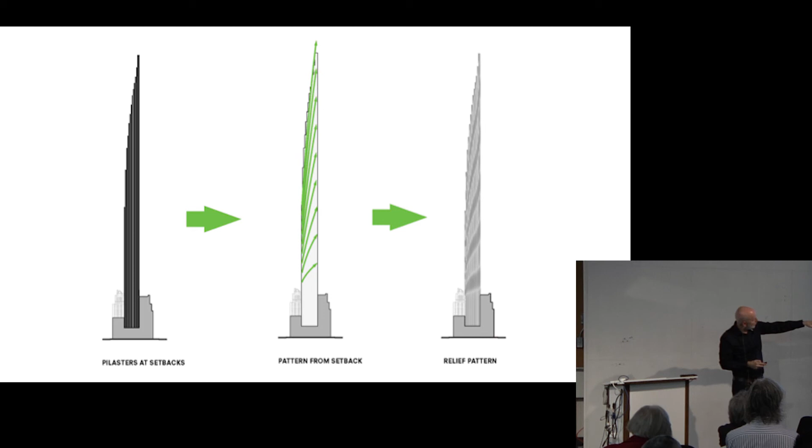And so it created sort of a shadow effect of that feathering that you see on the far side here. This is sort of a rendering that gives you a sense of that shimmering you get, which is actually the terracotta warping back and forth in the way the light is moving across it. You can just get a sense of that here in this earlier rendering. There's 23 different profiles that are extruded to make those shapes, and they go back and forth.

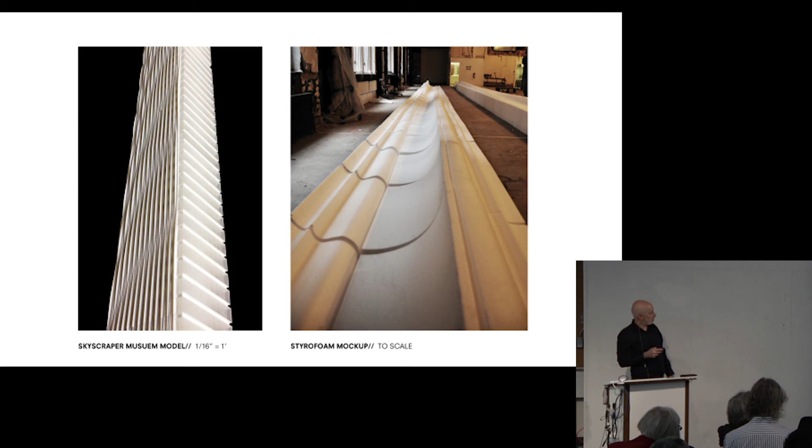And this is a little mock-up that we did in Styrofoam inside the Steinway Tower. Then our lighting observatoire has an LED light that goes along the side, so at night, just like the Empire State Building and Chrysler Building, you'll be able to see that terracotta glowing towards the park. Again, looking at how the different faces of the building are detailed.

And then the mass damper, the thing that helps stabilize the building, deals with wind loads. We've got some wind catchers in here that let the wind through, but we also have the tuned mass damper around here that helps deal with any type of movement the building might have.

And then above that, you've got about 200 feet of what we call vanity height. People are like, you go to a lot of developers and they're like, I'm not building 200 more feet if I can't lease that space. But that's what these old towers were—they were landmarks. You look at the Chrysler Tower, you look at the Empire State Building—except for the Empire State Building, they were actually making a docking station for airships up there, but it never happened. But the idea is that the towers really reached up into the sky, so there's an opportunity here.

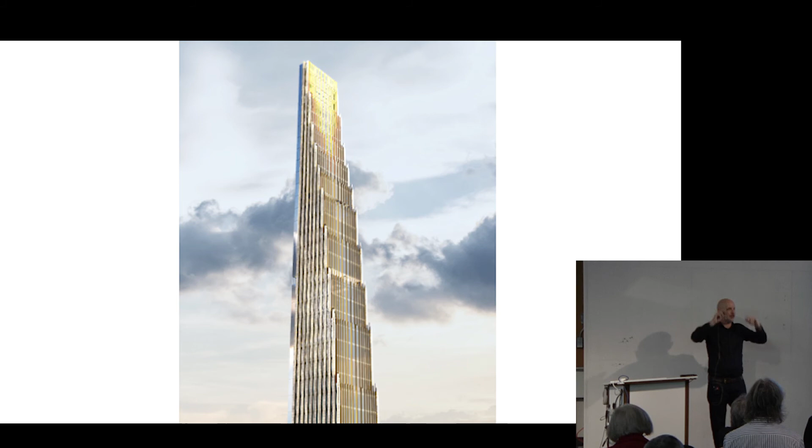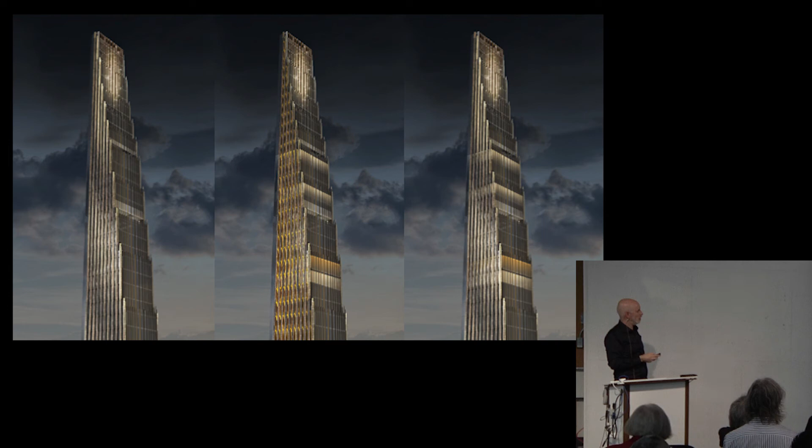As the setbacks keep decreasing, they eventually come to a 15-foot wide by 60-foot long tub, and that's where the window washing machine goes. And then there's the possibility of what we could do with lighting to really turn that into a moment that you see, not only from the park, but from other parts of the city.

So, obviously this is the high-end side of residential development. I mean, over the past 4 years, we've done close to 1.5 million square feet of affordable housing. And some of the technologies we're using there, like modular construction, address some of the issues of how you can get high quality but for, let's say, a more competitive price.

I would say with some of these projects, the technology and material sciences that we're using here will sort of influence how we work on some of these other projects. So it's not like you're doing design and saying, well, this is great for the 1%, and everybody else has to live another way. For us, it's really about understanding how we can use these different typologies, these different material systems, across many different typologies in a horizontal way.

This is a view from top of the rock at Rockefeller Center, and then that's the group. So just so you know, I'm a twin brother—this is my brother Bill there, and Gregg and Kim and the rest of the SHoP group. Anyway, thank you for listening.